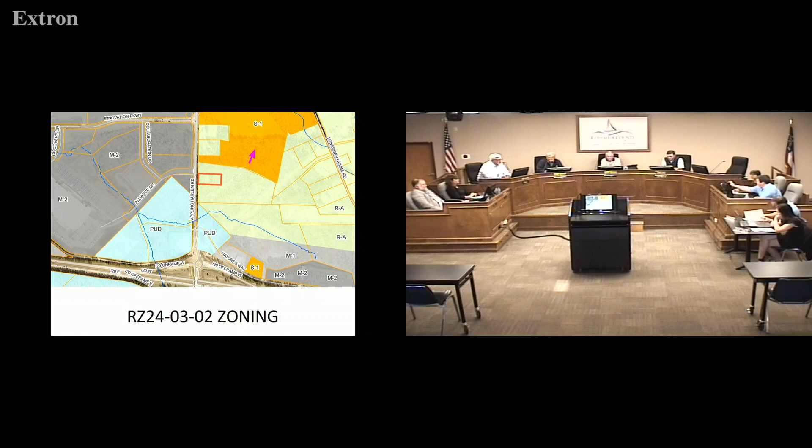Again, this shows the current zoning, which is RA. You have some planned development here, and also M2 for the White Oak Business Park, and the S1 up here is for a church. This shows an aerial view of the site, the existing site currently in residential use, and the plat of the property.

The overall plan is for a proposed convenience store, which is where the conditional use comes from. From a pure land use standpoint, this is within an activity center, so that request works out quite well. The request is for C1, though you could probably put M1 or M2 there fairly simply. So it's not really a huge issue from the land use side of things.

Before, when this was postponed, there were some issues raised by both the sheriff's office and staff regarding transportation on the site itself. We'll see that on the next slide.

What we're looking at is this protected right coming out of Alliance Drive, which gets a lot of use when Amazon changes shifts. This is how folks go south onto that road. There was some concern raised by the sheriff that vehicles could come in here and then whip around into this convenience store, so that was a primary issue.

Talking with GDOT, they said yes, this will have to be expanded. The protected right will go down to at least there. If we go back to the previous slide, you had the pork chop - that's what this is called for the right-in and right-out. That would have to be definitely enlarged.

Again, these are not engineered drawings - not something where they can say, okay, you're going to have to do exactly this. They're looking at it saying, okay, we know you're going to have to do it. The whole idea is to make it so you cannot turn left into this site.

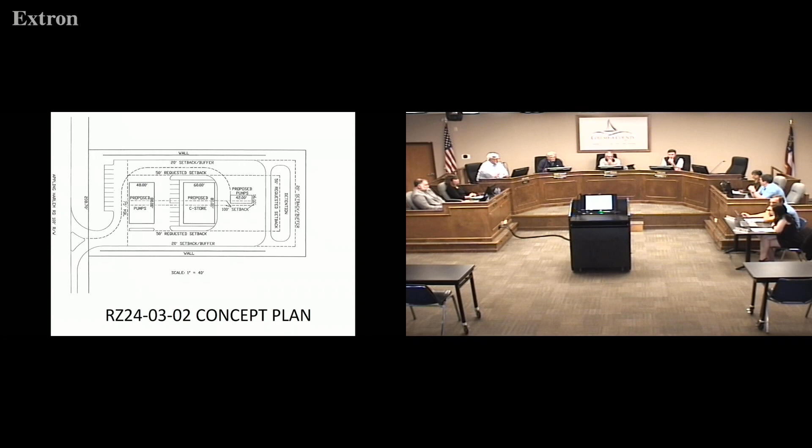It may be that those two things accomplish that goal, but it may be, if you go back to the next slide, that a small median will be put in somewhere on the property to prevent turning left if you're going south. There is a concern about rear-end collisions with this, and also sight distance on the site itself.

So the access side of things is going to be handled by GDOT, and it is an issue. However, at this point we feel it's far enough along, and we have enough information that we're comfortable moving forward with it at this time.

Due to all those factors, future development - like we're already talking about - within an activity center does allow for this type of development. There is some thought it could be closer to the interstate, but the parcels to the south in this area have, on the map, some topo and environmental issues, so they're not the easiest places to develop. This site, being further up the road, is probably a simpler site.

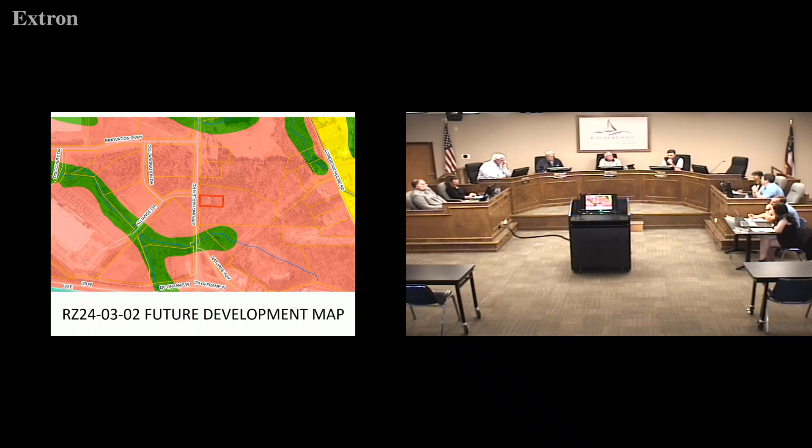Sir? Not to you, I do have a question for Will. What prevents them from- I just looked at it, I didn't see it before- what prevents them from making a left out of what part? Out of Alliance Drive?

So if you're coming in, if I saw that correctly, there's an ingress, egress to the right, you can't take a left out of there. Right, you have to go down and swing around, left? Is the entrance taking a left into the site? That's what I'm talking about when I say a left.

No, I'm talking- if you come out, you can't go left out of Alliance Drive onto Appling Harlem Highway. So if you are going to do that, you have to come down that pork chop and turn around. Well no, the way that it should function is you come all the way down and hit that roundabout and then go back up.

Back up, okay. The idea again, right now- could you pull a U-turn in there? Yeah, you could. I didn't try it, but I thought about it when I went over there a few weeks ago. You could do it. Now, are you supposed to?

No. And that's really where this becomes a target- okay, I want to get in there, therefore I don't want to go up and deal with Innovation Parkway and come in that way, I want to go this way. So if this isn't extended all the way down to where you can't pull a U-turn, then that's kind of what happens. Again, right now no one's wanting to do that, the best we can tell. It's somebody doing it that could, but it's not an easy place, you're not looking for a place to go at that point.

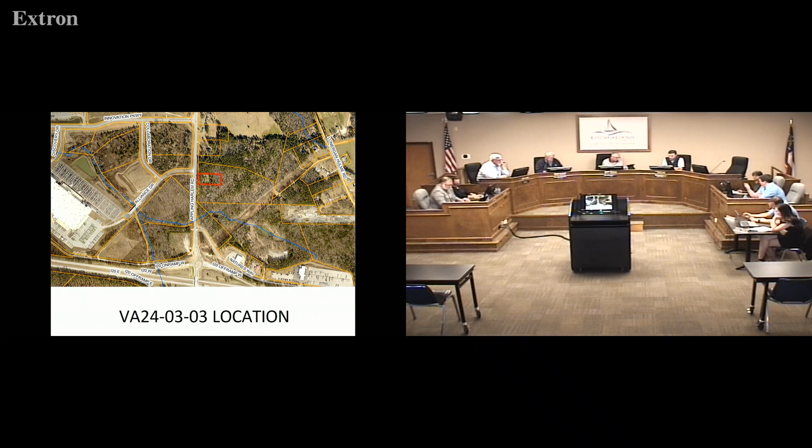Okay, go to the variance. All right, this is a request for a variance, section 90-147, 10B2I, use provisions on the same property at 1535 Appling Harlem Road. This is to decrease building separation. So again, property that we just dealt with on the east side of Appling Harlem Road, currently zoned RA. Property around it is zoned M2, PUD and S1. This shows the location of the property, the existing site, and also the plat of the property.

So what we're dealing with, and it's been well illustrated here by the applicant, is that with any kind of convenience store, you have a separation of the buildings on the site of basically 100 feet from anything zoned residential around it. This line here illustrates that. Basically you can't build a convenience store on the site without having a variance to this. And that's there to protect against lights, noise, sound, that sort of thing that can be detrimental with a convenience store. That's why it's there, that's the reason.

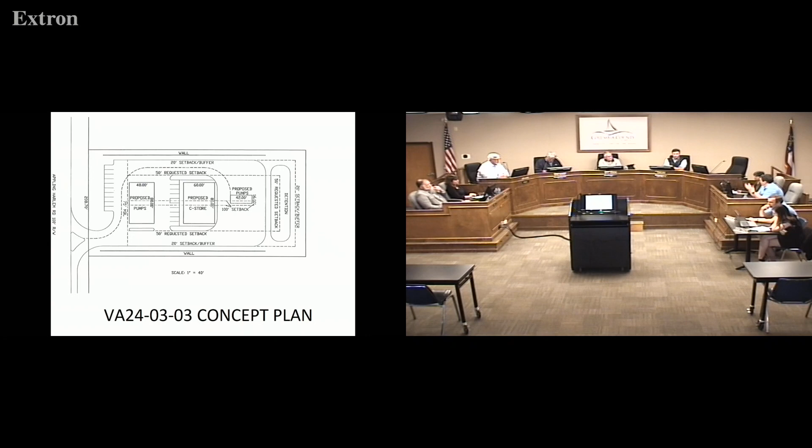So what the applicant has requested is to reduce that down to the 50-foot you can see here on the property. That gets all of their stuff for the use within that box. From a staff standpoint, there isn't a residential use near this. The property behind it is not currently being used for that. It could be potentially, so asking for only what they need is recommended, and that's what they've done. Due to those factors, staff does recommend approval of the variance request. Please, staff recommendation.

Would anyone in the audience like to speak out in favor of this? Would anyone in the audience like to speak out opposed?

Having a motion? Chairman, I make a motion to recommend approval of file VA 24-03-03, variance to section 90-147, to reduce the building separation from the residential properties for the proposed gas station at 1535 Appling Harlem Road.

Have a second? I'll second it. All in favor? Opposed? Carries.

Our next application is for rezoning from C3 heavy commercial to S1 for several parcels located just off of Rose Street. This shows the location of the 3 parcels that are part of this application off Rose Street, close to Bobby Jones Expressway, directly next to the Lowe's Shopping Center.

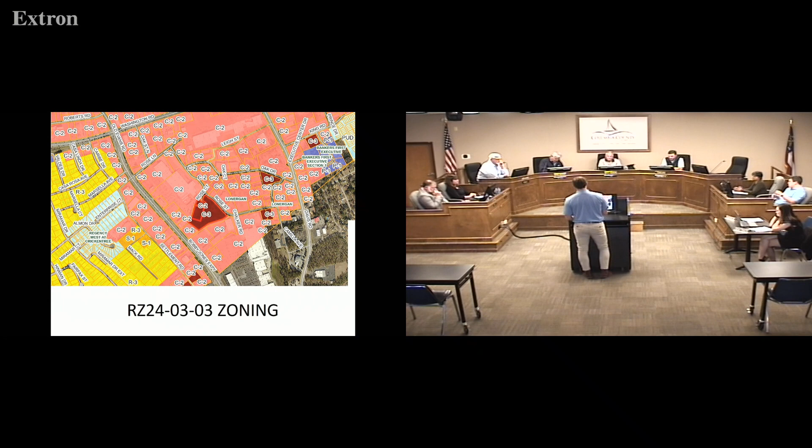This shows their current zoning. They're currently zoned C3 and surrounded on all sides by C2 property. C3 heavy commercial allows for more industrial uses compared to C2, which largely allows for commercial uses in the code.

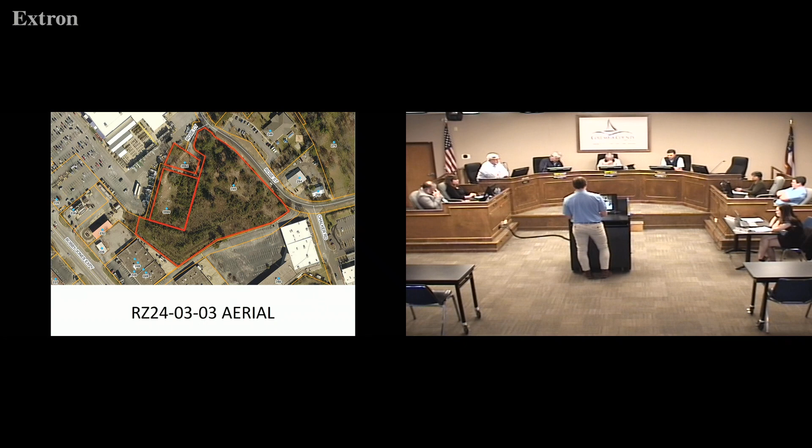This shows an aerial site of the property. It's undeveloped currently. The application also includes a small strip not outlined by red that is currently right-of-way, which will be reallocated toward this property, as the concept plan will illustrate in a moment. This is the current site, and this is the concept plan.

The history on this property is it's received various approvals for this self-storage use multiple times in the past. When the code allowed it as a conditional use in the C2 zoning district, this property had C2 zoning and received approval for that conditional use. After that, in 2020, they also received approval, similarly to this application, for S1 approval again for self-storage. However, then the applicant decided to go in a different development direction for more industrial warehouse uses, which lent itself to the C3 zoning district it currently has.

C3 would allow for self-storage on the property as it is currently zoned. However, the trade-off with this application is that C3 zoning, as it abuts C2 zoning, requires a structural buffer all the way around those lot lines.

The S1 zoning will allow the applicant to have a reduced buffer, and it allows greater architectural controls on the county side. All external walls on this property, including an 8-foot privacy wall that runs along the road frontage along Rose Street, will all be stucco and stone. That's more than normally would be required. And all the privacy fencing on the property will be wrought iron fencing.

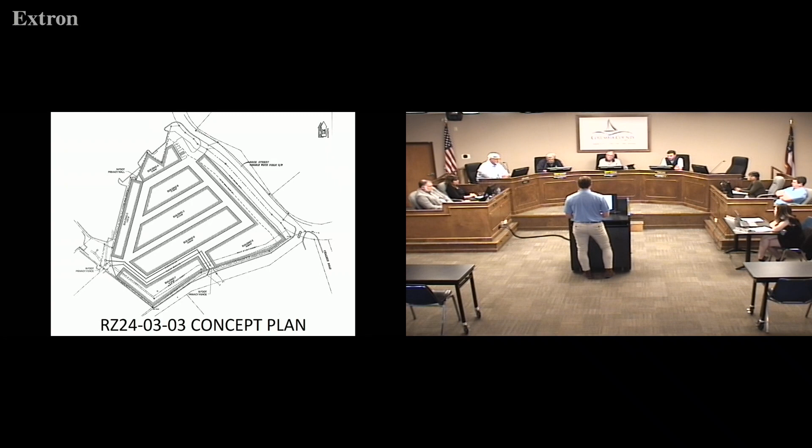So given those further concessions provided by the applicant, that's the trade-off for the reduced buffer that this S1 zoning would supply. All landscaping code requirements on this site would be met as well, including planting densities and the like. The next slide shows that this site is within an activity center, the Martinez Activity Center.

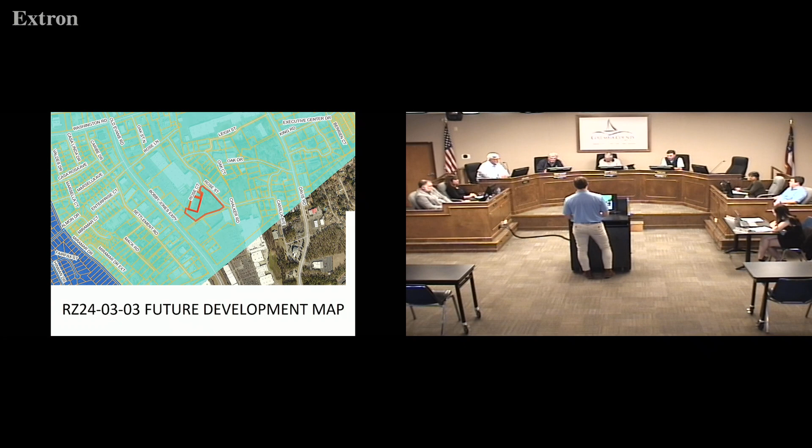While this activity center doesn't typically account for industrial uses like this self-storage facility, as I previously mentioned, C3 does allow for self-storage as it is currently. With the additional architectural requirements that the S1 zoning would bring, staff is recommending approval of this application, provided a combination plat for the 3 separate parcels be submitted to the county within 60 days of BOC approval, should they receive it.

Anybody here like to speak on behalf of this request? Owners? And is there anyone in the audience who would like to speak opposed to this request?

Have a motion? Chairman, I make a motion to recommend approval with conditions of file RZ 24-03-03, zoning from C3 to S1 for self-storage, properties at 245 Rose Street, 3862 Rose Court, 3866 Rose Lane. Second. All in favor? Carries. Douglas?

Yes, sir. Our next application is for a major revision at 2024 High Grass Court. This is a lot within the Crawford Creek subdivision, in the village section of that subdivision. This shows the location off of Hereford Farm Road, again in the Crawford Creek subdivision.

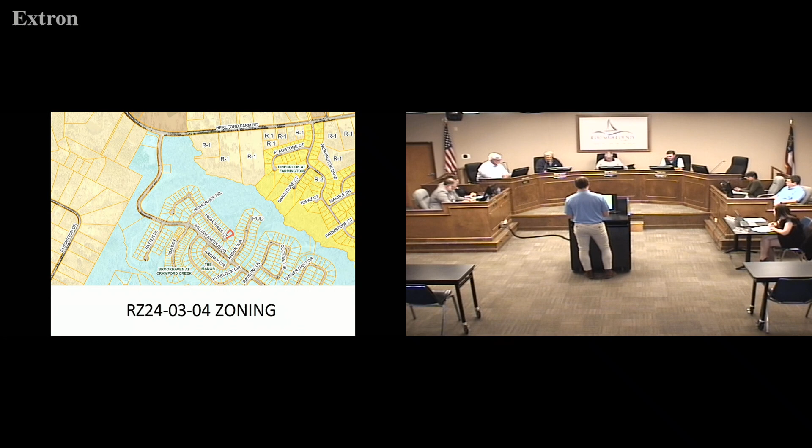This shows the zoning. The entirety of the Crawford Creek subdivision is zoned PUD, planned unit development. This is an aerial shot of the location and the home existing on location. This is a plat for the property, and this is the proposed concept plan.

This application is for a reduction to a rear setback for the installation of a pool. This lot, in this section of Crawford Creek, has 15-foot front setbacks and 7.5-foot side setbacks uniformly throughout it. However, this section also has 20-foot rear setbacks, which is somewhat atypical compared to other residential zoning districts for this lot size.

The reason for that larger rear setback, we believe, was originally that stormwater and drainage utility measures were planned to be installed along these rear lot lines. There is a stormwater and drainage utility easement that runs concurrently with that rear setback, 20 feet wide. However, none of those measures were ever installed at this location.

Our stormwater department, as they review all of our applications, reviewed this application and are fine with these plans, provided an easement encroachment agreement is filed, which the applicant has filed alongside this application. So the reduction would be from a 20-foot rear setback to a 10-foot rear setback.

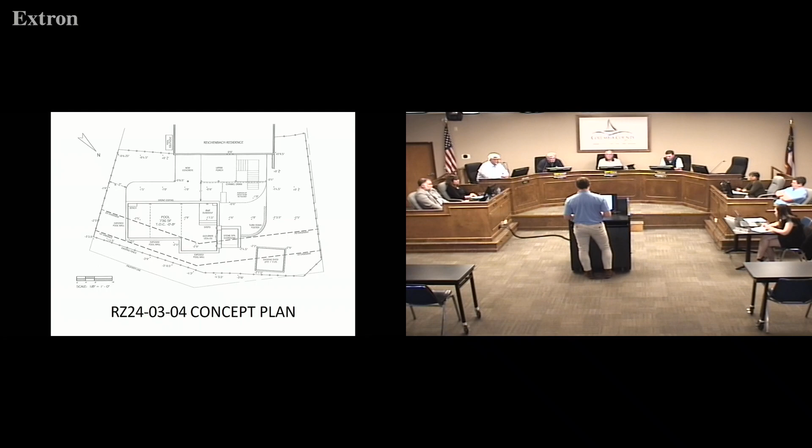So it's unlikely to be developed, and no one would be adversely affected by this reduction in the rear setback. Again, we had a condition included from our office about the existing shed — it would be the only thing allowed as an exception to the incoming 10-foot rear setback, should they gain approval. Stormwater also included a condition about filing the easement encroachment agreement, which is in process alongside this application. So staff is recommending approval with those conditions.

Anyone in the audience like to speak? Come on up. Anybody opposed would like to come?

Mr. Chairman, I'd like to make a motion to recommend approval with conditions of file RZ 24-03-04, a major PUD revision to reduce the rear setback at 2024 High Grass Court to 10 feet. Second? Second. All in favor? Carries.

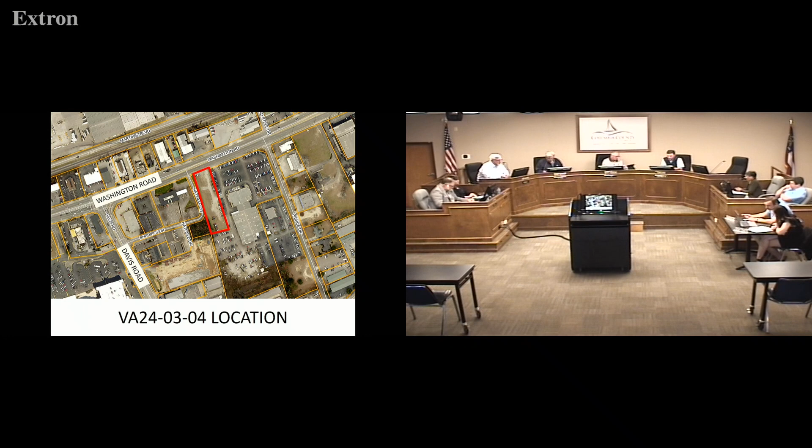Zoning is C2 in the C pod. This is the aerial of the property, which is basically undeveloped. Some site photographs here. And this is the plat of the property.

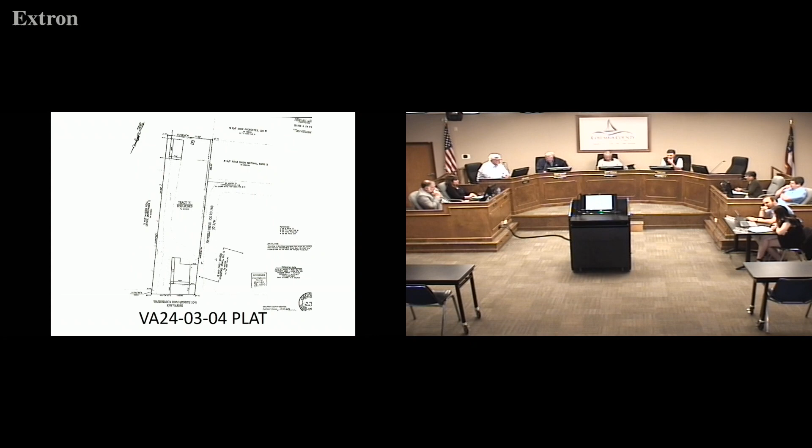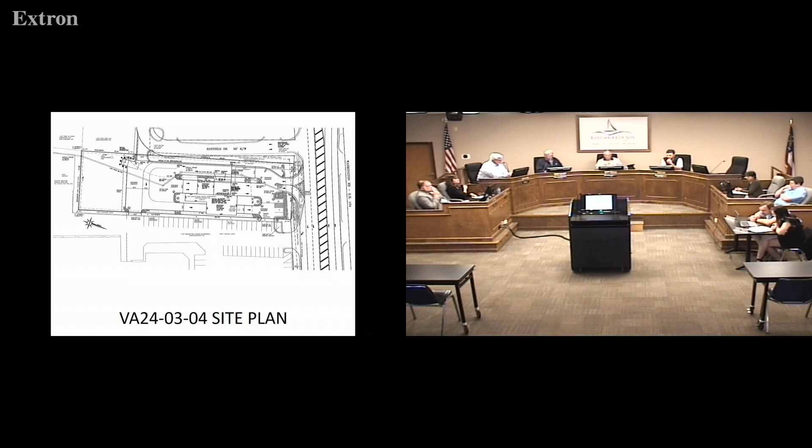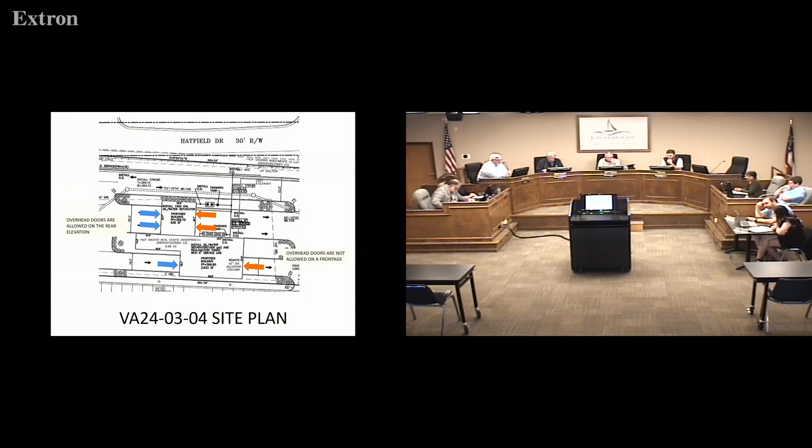This is the site plan in for review for this building, which is an oil change and car wash facility, basically for the Master Buick dealership and for public use as well. This photograph shows where the overhead doors, shown in blue, are allowed on the rear elevation. The ones in orange are the exit doors where the cars come through the building — those aren't allowed in the C-Pod, and that's what the variance is for.

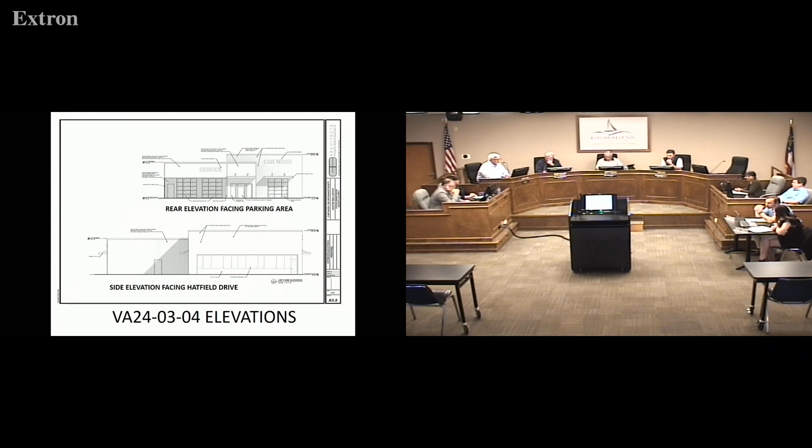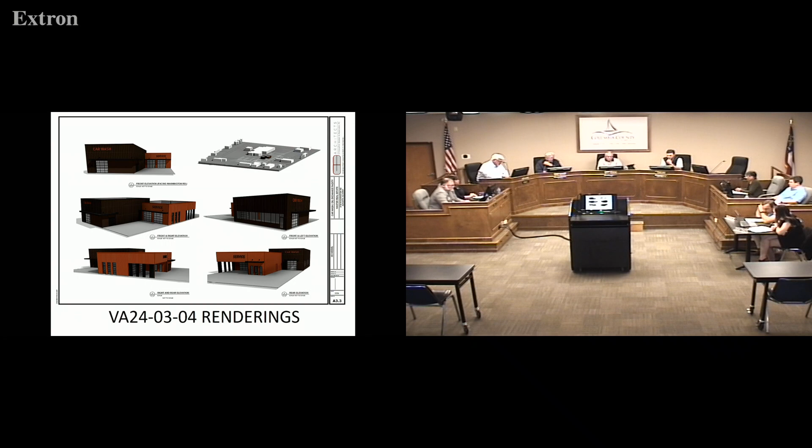These are the renderings of the building. They show the metal panels used on the building — earth tone colors that fit in with the general area. There are two types of panels used, a flat panel and a ribbed panel, which also breaks up the elevation and creates some interest. Staff is recommending approval with a condition that the final elevation shall be substantially similar to the submitted design for the variance application.

It was explained very well. We just have a narrow site, and we're trying to do a car wash, oil change facility to be used by the dealership and by the public. It's nearly impossible to get the roll-up doors on the sides, so we're going with a nice glass aluminum overhead door, which kind of matches storefront glass. The metal panels are trying to match the design intent of the dealership and the other dealerships on Washington Road.

This is a public use facility, not just for Masters. Correct, it'll be for both. Thank you.

Anyone else like to speak on behalf? Anyone opposed would like to come speak?

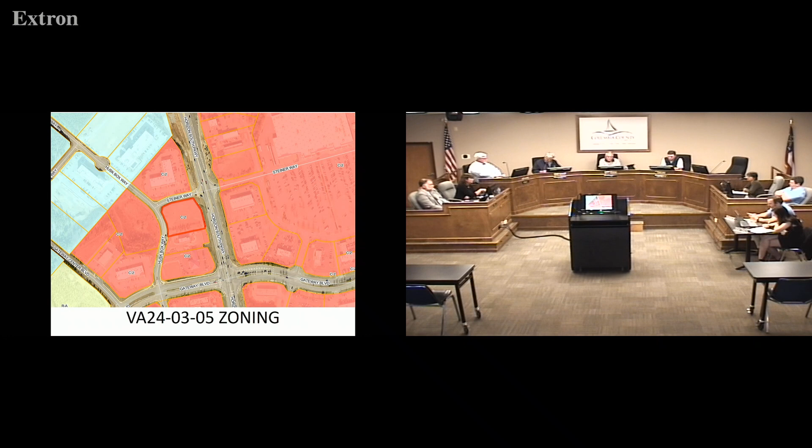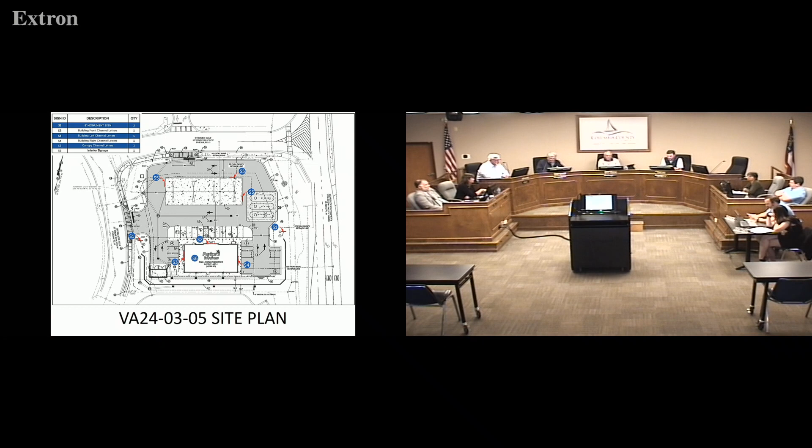This is the site plan, showing the building and the gas canopy on the north side of the site. It also shows the general layout and overall sign plan. They are intending to have 3 building signs as well as the freestanding sign on Horizon South, and then the 3 signs on the canopy.

The proposed canopy signs are 67.5 square feet, with one on each of the 3 sides of the canopy. Our county sign code allows 12 square feet, so that's quite a significant difference from what they're requesting. We've had one previous application for a variance to canopy signage in the county that was disapproved by the Board of Commissioners, similar in nature as far as size. That one was requesting a 68 square foot canopy sign, and it was turned down.

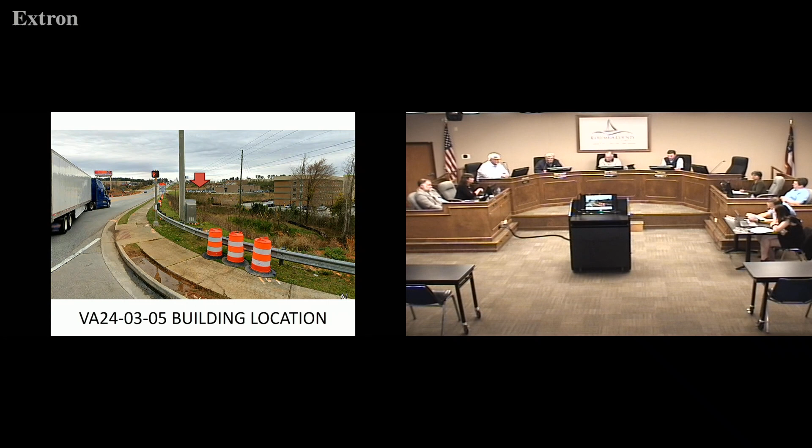It is already allowed the additional signage because it has the 3 road frontages. So staff is of the opinion that the additional canopy signage really isn't necessary, and the applicants have not demonstrated any hardship or loss of use from needing to follow the sign code. Staff is recommending disapproval of the variance request. Thank you.